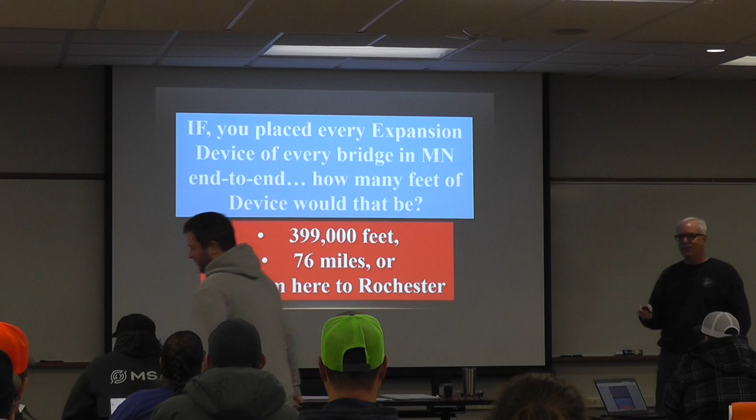Anytime you see this little dude pop up, that'll be a sign that we're going to have a question. I know you have the answers in your PowerPoint, but if you placed every expansion device of every bridge in Minnesota end-to-end, how many feet of device would that be? Anybody want to take a guess? Is it a lot, 1.5 million? 1.5 million feet? Oh, I never looked at that. Well, that's pretty big. Anyway, it's 76 miles, so it's literally about from here to Rochester if we were to stack them all next to each other. So it's a lot.

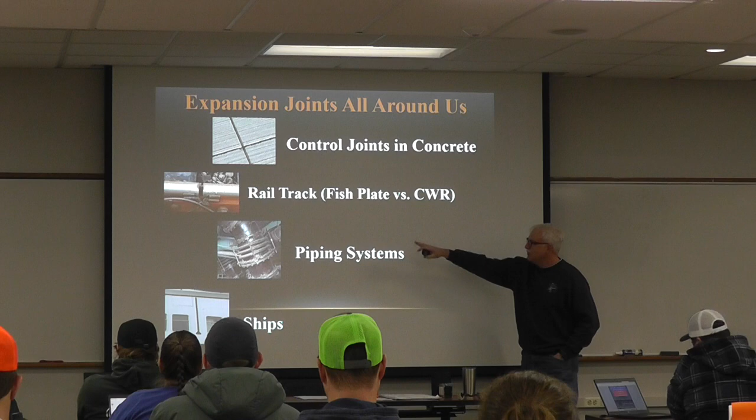Expansion joints are all around us because we have thermal expansion of every material. We always put in control joints. The last I heard from the concrete office is we try to keep them at about 15 feet or so, though that number changes all the time because of the concrete recipes. Railroad tracks have them too, they call them a fish plate. Piping systems have them, and big ships actually have them for flexing and expanding. So they are literally all around us.

Mr. Webster tells us an expansion joint is an assembly designed to accommodate the heat-induced expansion and contraction of construction materials. Expansion joint gaps were built into these structures because there were many cracks and stresses.

We have some older bridges that move a lot. I know of a couple bridges up in Duluth that move their ramp going up to mainline 35. You'd think gravity would make the bridge go downhill, but it doesn't, it moves up. The engineers will scratch their head for years on why, but we just accommodated it and figured it out. That bridge is moving uphill.

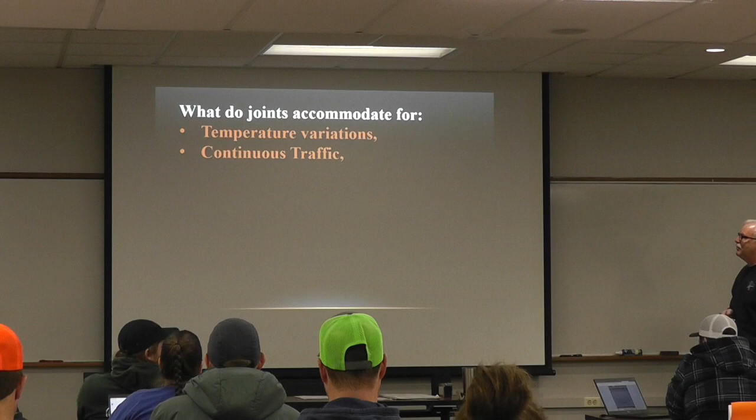What do joints accommodate for? Temperature is probably the biggest one. Also traffic movement, live load, wind loads, we get ice loads on bridges, shrinkage and creep.

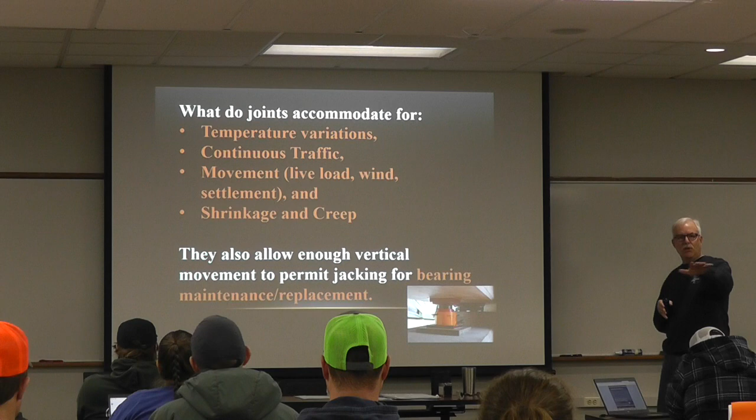Sometimes we have to go out because our bearing assembly has moved. We have some bridges that are pretty active. If you're familiar with 494, past the airport going eastbound over the Minnesota River, those two long bridges, 9217 east and westbound, have neoprene expansion bearing pads in there, and the bridge moves enough that the pad actually walks out underneath the bridge. So maintenance has to go in, jack up the bridge so the expansion joint allows the bridge to come up while the abutment stays static, and they move those bearing pads back into place and bring the bridge back down. So we have to have something in the bridge to allow us to jack it up.

So why include joints on the bridge? Do all bridges have expansion joint devices in the superstructure? Does everybody say yes, or does everybody say no? Who thinks all bridges have expansion joints? Who says they don't?

So we have integral and semi-integral abutments. You've already gone through integral and semi-integral, Paul? Yep, so you guys know what those are, a single line of piles. Where's the expansion joint on that type of bridge?

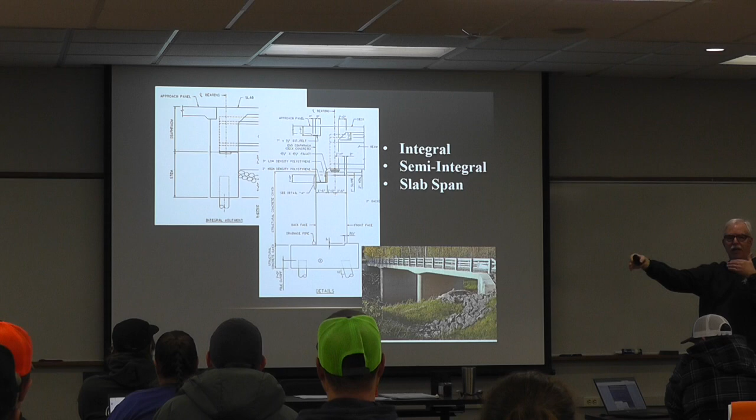On the approach, right? You typically add a 20-foot approach panel tied directly to the abutment, and as the bridge expands it literally moves like this, theoretically. On semi-integral abutments, you sit on a bearing, there's a beam coming across tied into the upper part, and the expansion happens right there. Slab spans are a rig of their own, they don't have an integral or semi-integral condition on both ends. We have bridges that have one type on one end and the other type on the other end.

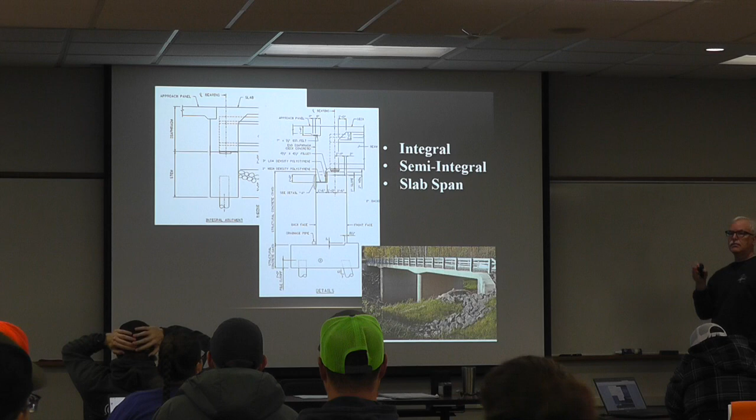Yep, we do. So here's a behind-the-scenes picture of an integral abutment. You can see we put a little tiny neoprene pad underneath there, and some foam underneath the front of that. Then this all gets filled in with concrete right around the beam end, and this allows the beam to rock back and forth like this. The beam's going to flex and move, so we put a little neoprene pad underneath there, and then we fill it all in with concrete. That's what it looks like at the finished end.

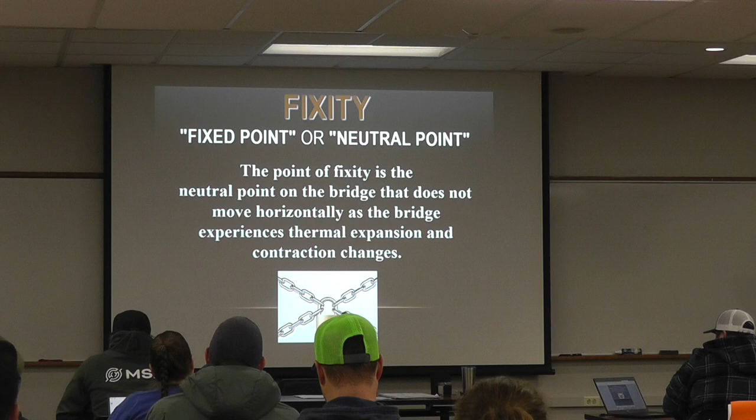Fixity is a term the designers use, and it means the point of fixity is the neutral point on the bridge that does not move horizontally, so everything is locked right in at that spot. If we think of a two-span bridge with one pier in the middle, most likely that bearing would be fixed, so everything is going to move from that point out towards each end.

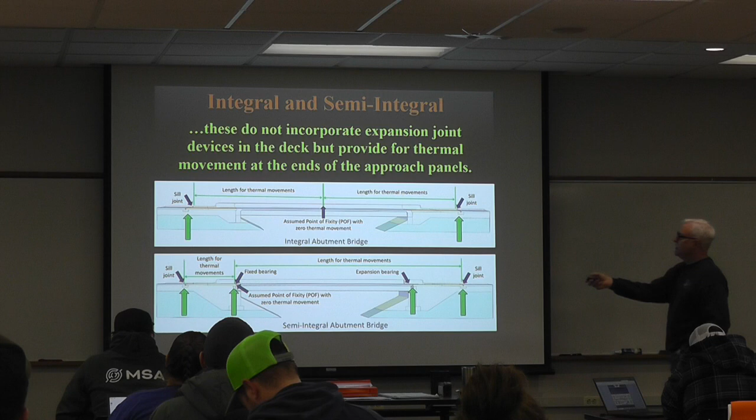Here's a nice little diagram that a consultant put together, and I borrowed it. This is a semi-integral bridge, and you can see we're fixed out here near the center, that's the theory again, so everything's going to be moving this way, or everything should be coming this way. It's not necessarily fixed, but that's the point of fixity. On a semi-integral, you can see this is labeled as a fixed bearing on this end, and then there's an expansion on this end. So they build it so that it's kind of locked in, and all the movement goes this way.

Here's your expansion joint out here at the end of the approach panel. We call that a sill, or sometimes our generic term is a sleeper slab that we would build underneath, and that keeps the approach panel and the concrete main line from having some type of differential settlement. So that sill helps support. Okay, makes sense, everybody so far?

Parapet abutments, those are the high abutments. A lot of times they'll have an expansion joint on each end. And we would still have an approach panel. We would still have another opportunity for expansion out there, because that's going to take up the expansion of the main line coming up to the approach.

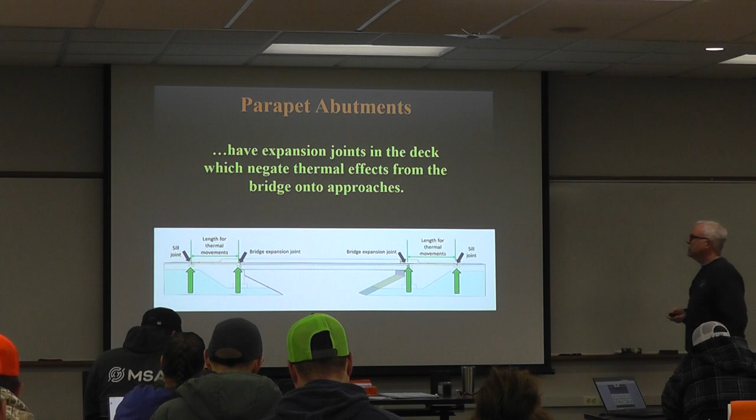So we used to call them E8H, stand for expansion joint, and then this was 8/2, a 4-inch opening, and then the H was a hot pour, and then they changed, they added a 1 in there, and now we're back to an E8 or an E5. E5 is brand new, probably from March of 24, when it was introduced on the new approach panel standard sheets. So an E8 is a 4-inch opening.

You can see that here. This is looking down. Here's the concrete approach, and then there's the main line. So we're going to fill this 4-inch opening with some type of a seal. This is kind of the popular one. It's a real dense foam, and then it has a silicone top on it, which is the UV protection part. And this is under pressure, squeezed right now, so if you cut this plastic off, it starts to open on its own. And then you put adhesive on the sides.

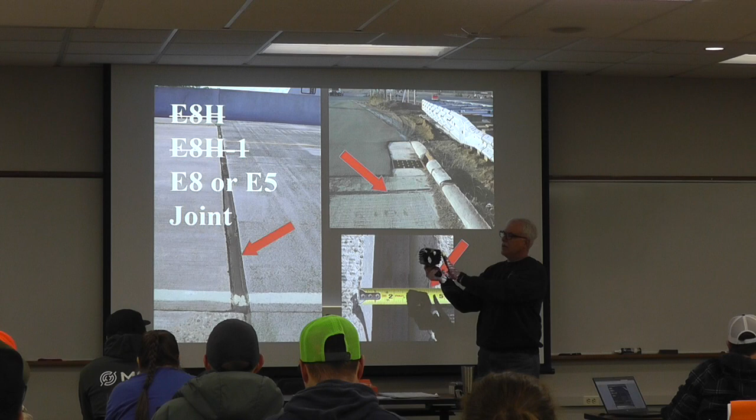It worked pretty well. Another opportunity is this DS Brown gland, and they fill these little ridges on the side with epoxy, and smear epoxy on the concrete as well. On both sides, they push it down. This is the DS Brown JP 400, 4 inches. They call it the JP because it's pedestrian, so it's flat on top instead of being a deep V.

So if people are wearing high heels or something, walking across, you want that to be continuous. This is probably the Cadillac, and this would be the next step down, but we look at them both as equals on the APL. The contractor's going to install most of the time the least expensive product that they can purchase, since we're a low bid state.

Okay, so everybody gets an idea, this was the old style, it was a piece of foam, I think about 8 inches tall, 4.5 inches wide. You put some lube adhesive on the side of the concrete, and push that foam down in there. So it was about 1.5 inches below the driving surface, and then they put a hot pour on top of it. That's what you see here, the hot pour on top, like a crumb rubber hot pour, what you'd use in joints.

All right, so this was the latest I heard: bridges up to 340 feet, we can build without expansion joints on the bridge, so again that'd be semi-integral or integral. And I was going to mention, what does the E5 mean? That's a 2.5 inch joint. So we might have a really short bridge where we don't need a 4-inch opening, so they would choose to put a 2.5 inch joint. When a joint opening, let's say this is a concrete main line on this side, and that's opening up, maybe migrating away.

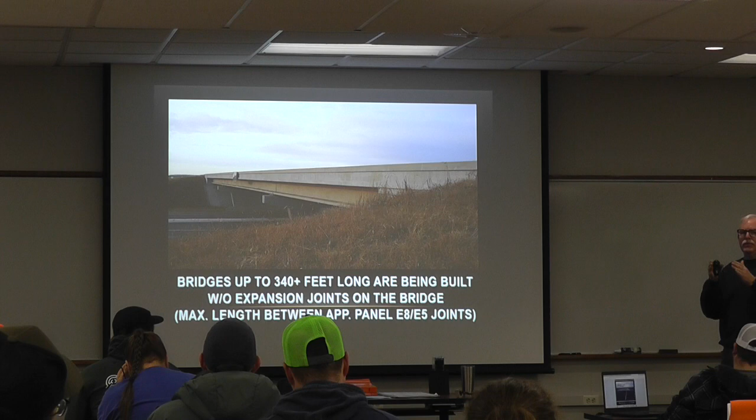When an opening gets to about 5 inches, we start to get phone calls, because that's pretty significant, wheels are dropping into that, especially on motorcycles, and people are recognizing, hey, maybe there's something wrong with this.

So this is 371, I think, up by Fort Ripley, a bridge, and it's an integral bridge. So there's no joint, but there is a sawed and sealed joint there because the bridge is going to stay static, right? It's not going to shrink or dip. But the approach panel is hooked to the abutment, and the approach panel might settle, because we really don't have anything underneath that approach panel as a footing to keep it from settling. So we do put a sawed and sealed joint right where it meets the abutment.

And in this case, since there's bituminous, would there be an E8 joint or an E5 joint in here? Typically not, typically they just butt it right up to it. And then maintenance deals with that, expanding and contracting. In the summer it might expand and get a bump there, and then the snowplow comes through in the fall or winter and takes care of that. So a little bit of a maintenance issue right here.

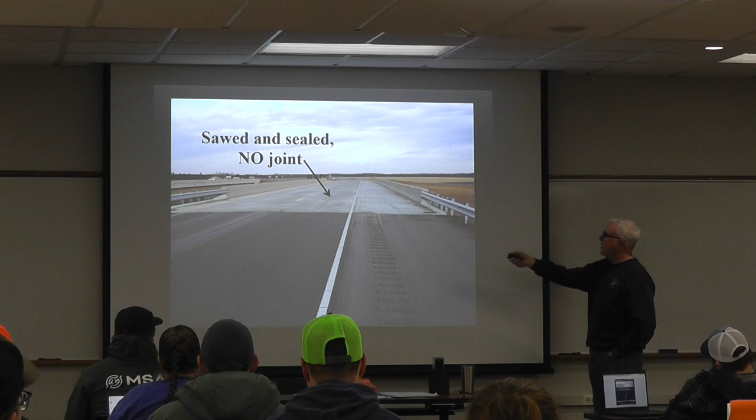Okay, so there are three main types of joints, depending on the amount of calculated movement. First, steel finger joints - the finger joint is literally that. That's two steel plates, and they look just like your fingers, and they open and close like this.

Then we have the waterproof single gland - this is the steel flex. These pieces, which you'll see later when I take you into the shop, have extra big pieces of steel on them, and they're cast right into the deck. And then we have the SSA2 gland, which is kind of the latest and greatest - we've been using this one for a very long time.

So there are different names for that. Some call them strip seals, which is probably the most common. Some people say strip steel, but expansion joint, single gland, strip seals - all pretty common terms.

And then we have the modular joint, and that accommodates really, really big, long bridges. The St. Croix River Crossing had some massive ones - 13 cells, 39 inches of movement. It had to accommodate for 39 inches of movement on that bridge.

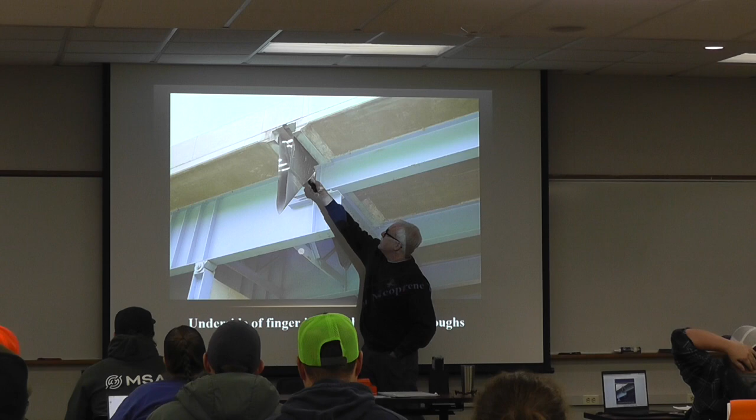So here's a picture. This is Interstate 94 near Fargo, Moorhead, going across the river. You can see there's that finger where the lights come through up here - that's the finger joint.

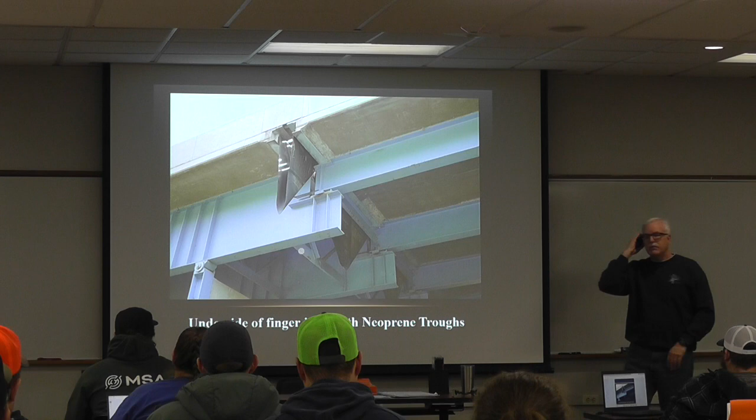But what happens at that finger joint is everything comes through there, it doesn't go off the end of the bridge. So we have to accommodate and put some type of a rubber drape in here to keep salts and moisture off of these bearings, these hinge bearings. Sometimes they call it diapering - there's a trough that's built at a pretty steep angle, so it kind of self-flushes itself. There's a few of these around.

In the past, this has been an evolution with expansion devices. Two main expansion devices were used - one called the steel slide plate, and then the finger joints were pretty common. However, chronic maintenance problems due to leakage, binding, corrosion, and collection of debris are there. Anytime you put steel in the road surface, you're asking for corrosion. Steel always wants to get back to its natural state, so it wants to rust, wants to corrode, and it's a constant maintenance issue. Here you can see a tremendous amount of patching - here is a great example of a finger joint.

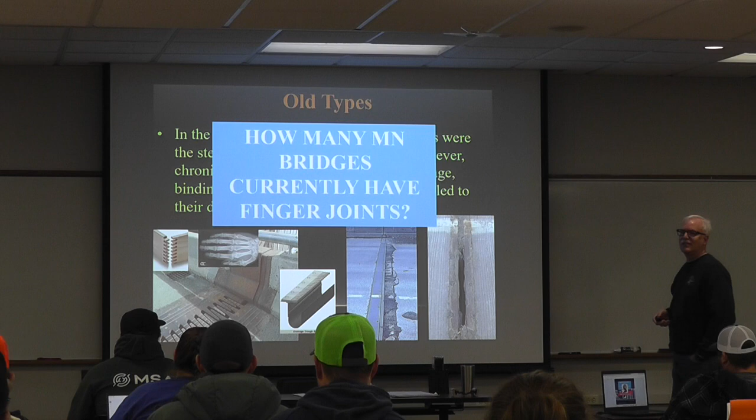So District 7 - that's District 6, I'm sorry, the southeast corner of Minnesota. There's a maintenance supervisor down there named Larry Walensky, a super guy, very knowledgeable about bridges. We built a new bridge down there, and he wanted the finger joints in that bridge instead of the modulars. So that was the latest - this number was going down, but then we added one to it.

That was the latest. I don't know, Paul, if you can think of any other bridges that asked for finger joints - we usually try to get them out of there. With the diaper system to control the water, I think they've become better. With the modular, that's the way we've gone. Modulars aren't cheap, but they work really well. We'll see a picture of one coming up here.

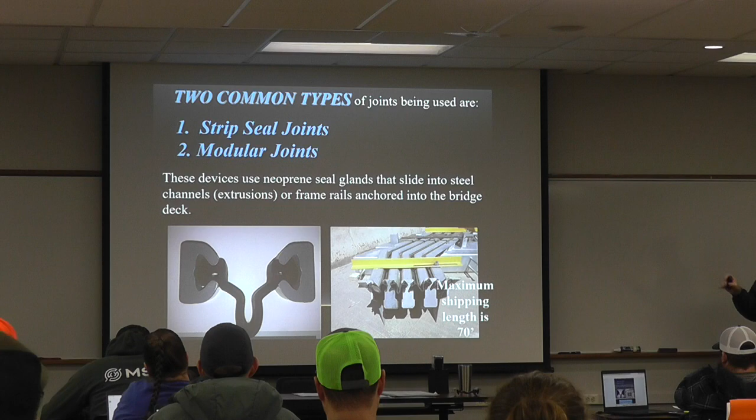When was the first strip seal expansion joint used in Minnesota? Jason? 1974. Thank you.

All right, this was it right here. So like I said, this has evolved. These different lobes and different glands, different pieces of steel have changed over time. You can see from 1974 to 1990, approximately 540 bridges. The fabrication methods group in the bridge office keeps really good tabs on this.

And we have some suppliers that will actually make these glands for us if maintenance needs to replace one. They'll be able to extrude it. They still have the molds.

So I put together a panel, I don't know if I have a picture of it or not, but I put together a panel. We still have it in the bridge office. Tom Merritt was our fab methods engineer, and he had this big filing cabinet, and he had what we call the gosh wow drawer.

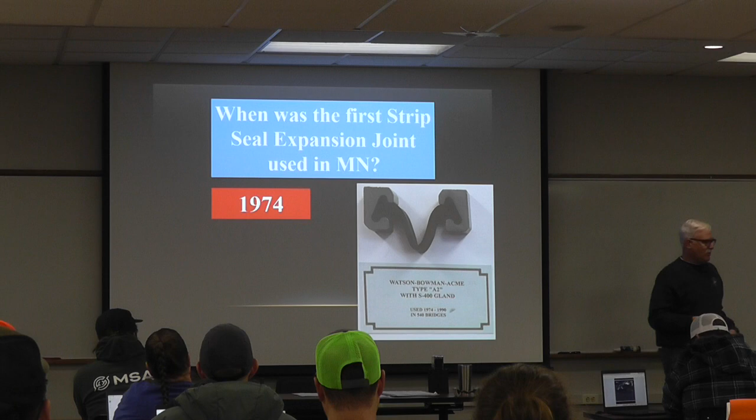You'd go in there and pull stuff out, and he'd show and tell. So one Friday after he left work, I went into his gosh wow drawer and I took all these pieces of glands and stuff like this home, sliced them three quarters of an inch, painted them up, glued them on this big board, and he was so proud he'd carry that thing around to meetings. It's a great example of all the different glands we use.

So how does an engineer determine the need for an expansion system? For a simple single span, it's usually fixed on the lower end. Like I said, we have some bridges that move uphill, but typically that would be fixed and then you'd expect it to move up. Again, typically, generally speaking.

Two-span structures are fixed at the pier, we talked about that. And for a three-span, they really literally have to investigate the stiffness of the structure, and they'll figure that out. So there's no hard and fast rules, just some theory and investigation that they have to do.

The number and location of expansion joints is determined based on the maximum joint opening. Typically, we're looking at 4 inches on each end of the bridge, unless we're looking at one of these big bridges—then all bets are off.

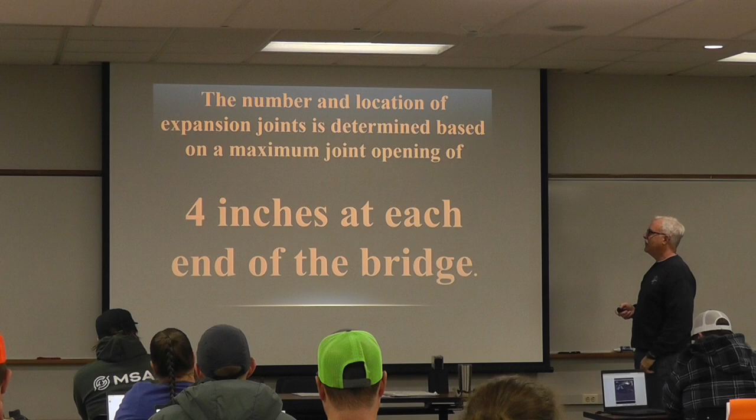When joints exceed 4 inches, we can provide a modular, or we can provide additional joints at the piers to split the superstructure into segments. So like those 2 bridges by the airport, 9217 east and west of 494, those have multiple expansion joints—can't remember how many, maybe a dozen.

As you're going across the bridge, next time you drive it, listen for them—boom, boom, boom, boom, boom, boom, like that. They're doing a big rehab on those 2 bridges. I think this coming summer will be the end of it. But it's just such a big bridge, we had no choice but to put in joints.

So in the past, we used to put in scuppers. A scupper is just a drain tube in the gutter line that drains right out into the water or wherever it wants to drain. And hydraulics told us a few years back that we can't do that anymore.

So we have to try to build our structures with enough vertical curve in them to make sure the salts and stuff get off the bridge onto the land instead of dropping into the water. So you'll see a lot less of that. You can probably notice the difference—we have a lot of bridges with a lot of scuppers, but we try not to do that anymore.

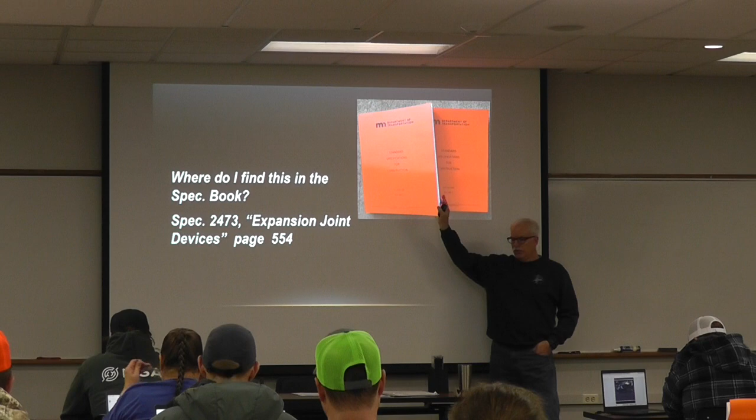Okay, where did we find this information? A few years back, everything used to be in spec section 2402, titled steel bridge construction. Then 4 or 5 years ago, we figured that expansion joints—the single gland and the modular—had enough of their own information that they should have their own section of the spec book. So we switched over to 2473. That's where you find the information now.

And this is what it looks like on that page: a watertight expansion joint device consisting of a formed, non-reinforced strip seal that is mechanically locked into the structure.

And then when it gets to the railings, what does it do? At the barriers, it turns up, so that we're trying to keep all of that nasty stuff that's on the bridge going off onto the approaches, not into the water or below.

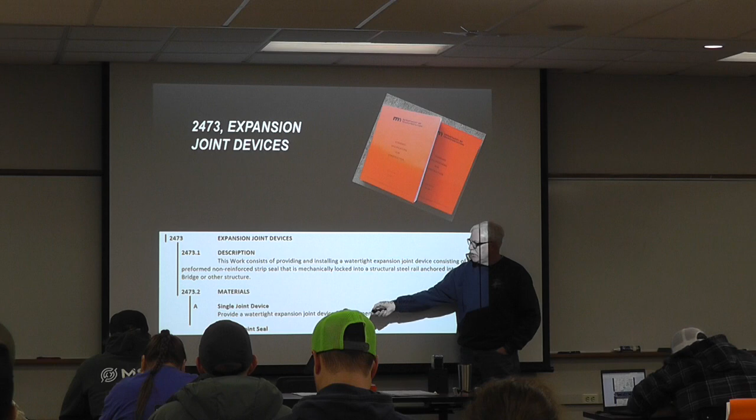In that section of the spec book, there's the single joint device, and the modulars are in there as well. If we're going to use a finger joint, I think we're going to write a special provision for that.

Okay, so let's take a look at the bridge plans and then some standards. Lots and lots of detail. So this is a raw standard sheet right when the designer gets it.

Anytime you see these little bubbles like this, they will all be deleted when the designer is done with it. But this is notes to the designer.

This particular note here, we're trying to tell them how far below the road surface is the top of this joint. So from this point to the top of the road surface, we're trying to tell them the depth. So the depth might change if the bridge is at a skew and we have to put snowplow straps on top of these.

So we put a steel strap across the top. When the snowplow comes along, the snowplow just continues to ride right over the top. If that snowplow strap wasn't there, then that plow blade has a tendency to drop into that, and it really makes a mess out of the plow, the driver, and the bridge. So that's what this is about.

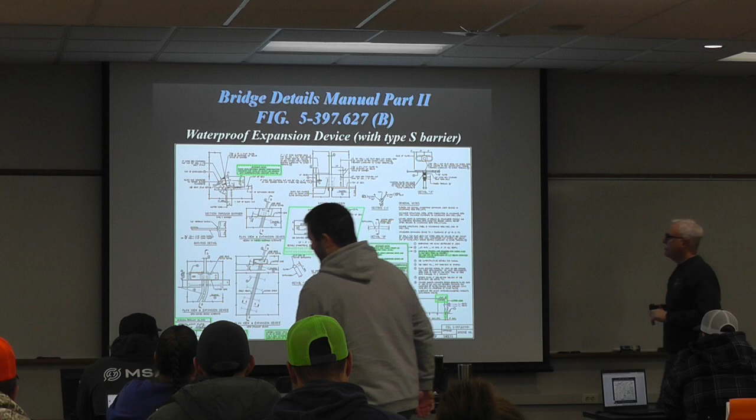Sometimes we plane our bridges for noise reasons, so we would finish the deck and then this big planer would come longitudinally and drive down the bridge and remove a certain thickness and level it out. So it depends on if we have a snowplow strap or if we have that planing going on. That's what this table's all about.

They're going to put a number in here, and that's what you have to assure when they do the dry run. When that machine comes over the end of the bridge, you want to be there, and you want to make sure that it's that 3/4 or 7/8 of an inch or whatever. Not like this, and not like this — it has to be just right.

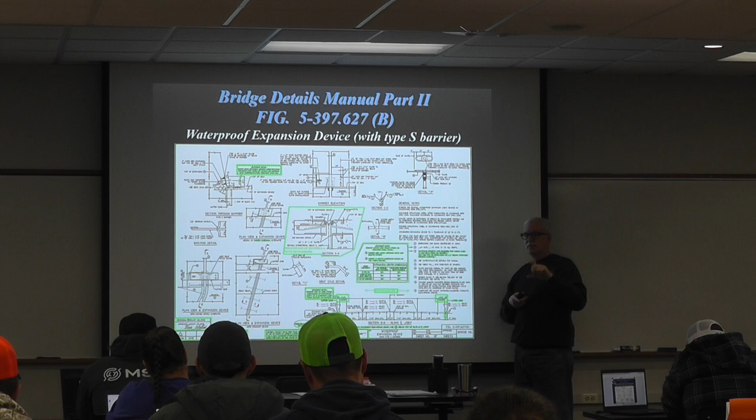And we have them that are like this. The St. Peter Bridge, 169 over the river, there was an error — something happened during construction. Anyway, that's the whole story behind that. We won't get into that. That was a bad scene.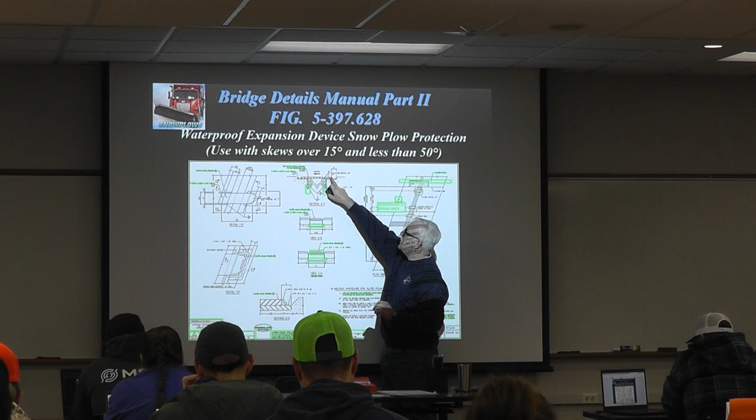Ton of information on here about expansion joint devices. This is a detail here, very, very detailed. These little angles will come welded already onto the strip seal, and then this is the snowplow plate, and that will be welded in the field.

There's a very specific weld procedure. There's also some information in here about what they have to use, how they have to prep that, and how they have to weld that.

The biggest thing is that the rubber gland will already be in there when they lay that steel strap on top. So they have to — there's the expansion device right underneath here — they usually will fill that with like some wet sand or something to prevent the weld splatter and stuff from wrecking that rubber gland.

Super important, what you see here are the wheel tracks. This is where cars should be driving typically. We try to keep those snowplow straps out of the wheel tracks. We found really early on that if we had one in here, the slap from semis or whatever would bust those pretty quickly. So that's what that's all about.

Some more information here — some of these dimensions have changed. So the first plow strap is 1 foot off the gutter, and then we have a maximum spacing. But we'll try to lay this out for you, so it's not as simple — you just got to make sure that the contractor's following the plan.

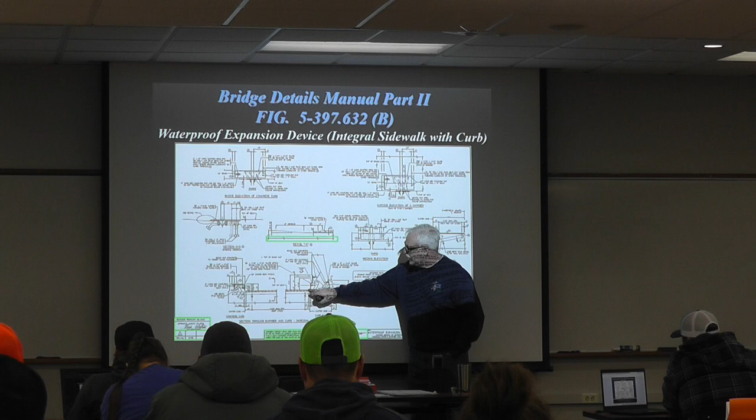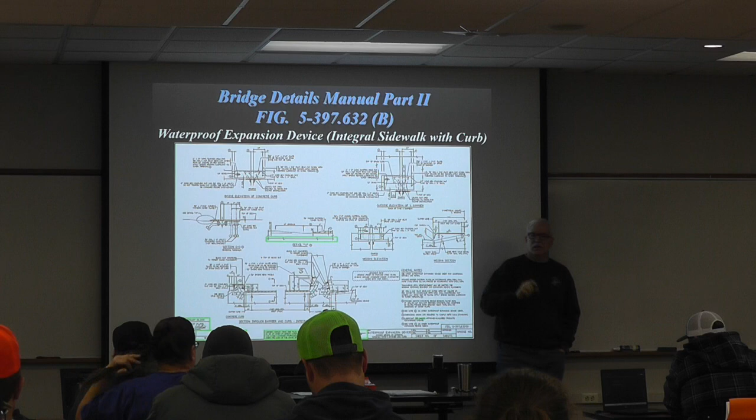I just want to show, there's that turn up, right? It goes up into so that everything stays in the gutter. So this might be a sidewalk right here, and then we have a traffic barrier, and then back out onto the bridge, driving surface here. But in each barrier we have turn-ups. If we have a sidewalk, it's just going to be a little bit longer, but it's still going to be there, okay? And that gland is going all the way through. The gland is coming all the way up. It's going to stick about an inch above the end of that extrusion, okay?

When they're setting these expansion devices, so here we have a center median, a roadway surface, a traffic barrier, a sidewalk, etc. We have elevations, and the people that are putting those expansion devices in, I think, do a really good job. They're shooting those elevations all the time and making sure that they're correct.

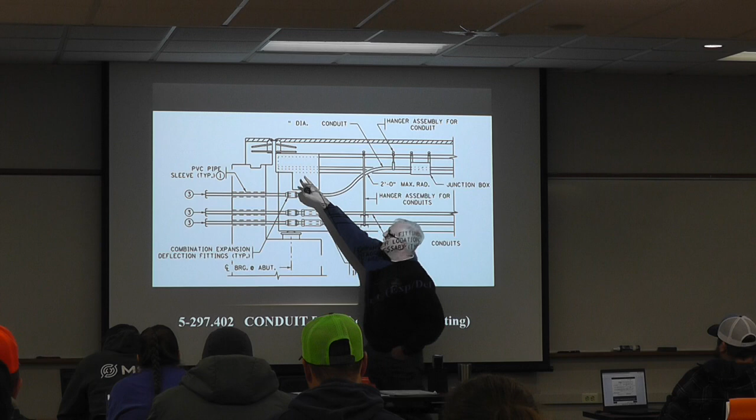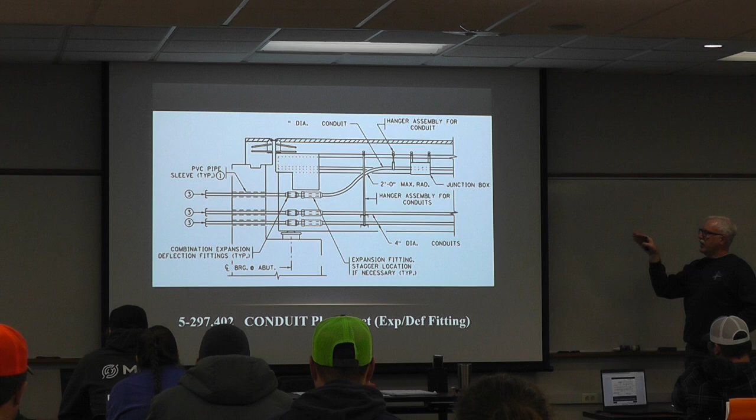So this would be the bridge coming across, and then it hits the abutment. There's the bearing, and then sometimes we have conduits in here. So there's our expansion joint. So the bridge can open and close this way. This is pretty static, right? And the bridge can go up or down. So if we need to jack it, we can lift the bridge up. So for that reason, we have to put expansion deflection joints. So they expand and deflect so that the conduit doesn't break, right? The conduit has to be able to do the same thing that the bridge is doing. So you'll see those.

It's kind of all things expansion today, right? It's going to go forward into the concrete, and usually especially for the deflection, it's just going to be a big rubber tube so that it can move, and they put shrink wrap, bubble wrap, something, whatever they each have, different things to create that void around that deflection, okay?

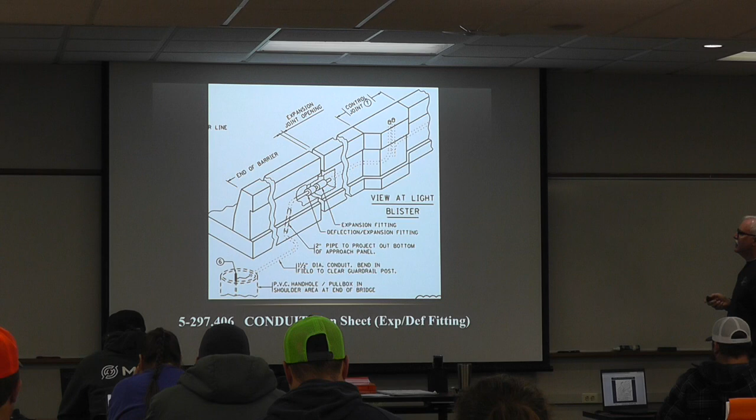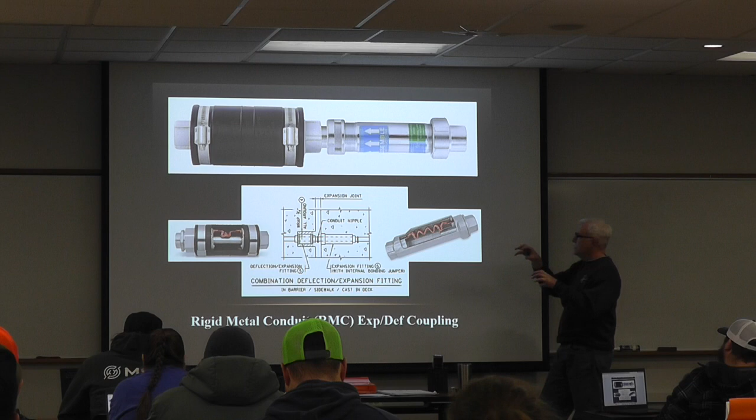Here's a good picture of what that looks like. So this is a sleeve, and the conduit goes inside of this, so this can go back and forth, and that's the big deflection. And everything is grounded, right? Everything is grounded, so there's jumper wires inside. But that's the void I was talking about right here, around this deflection rubber, so that it can go up or down. So again, if we're going to jack the bridge, we have to know that that's in there, or we're going to tear something apart.

Okay, so shop drawing review. We, in the bridge office, the designers put together the sheets, pretty generic looking. Then they go to a fabricator, who's an approved fabricator, and they have to draw up their own shop drawings, which are super detailed. And then those shop drawings come back into the bridge office, into the Fab Methods unit, and they look through them to ensure that everything is correct.

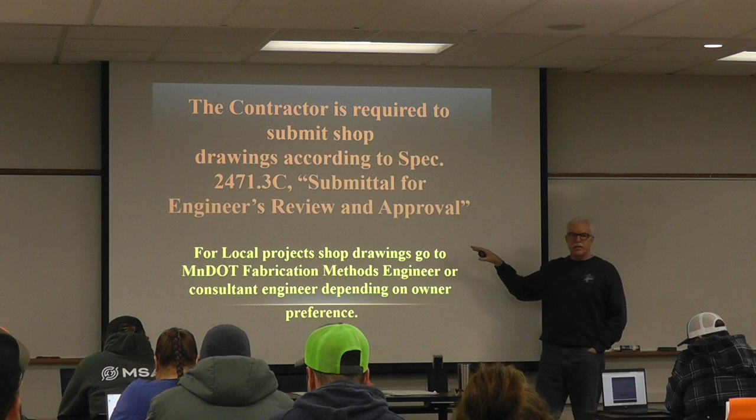Okay, and that's just where it's spelled out of where they have to send them and stuff like that for review. Local projects, cities and counties, they can choose to defer that to a consultant, or some cities are big enough where they can do it in-house. Minneapolis, they have their own bridge crew, bridge team. But for all MnDOT jobs, they come into the bridge office to the Fab Methods unit.

So this was Ironworks. They do a fantastic job. I asked them if I could show their shop drawings in class. They said absolutely. So again, what's the little flag mean? Field weld. So this device is going to come out. There's a crown break right there. That's the center of the bridge. That's a crown. So they'll put everything into those right elevations and the field weld that.

Okay, here's the plow strap detail. There's the gland. Minnesota requires a 1/4-inch gland. Most states require 3/16. So we're unique in that area, but we found that 1/4 inch is better. So that's something you're going to look for.

We had one modular joint come out for the Bloomington Ferry Bridge, and the inspector saw it got offloaded off the truck, and he looked at it, and he could tell just from a distance that those glands didn't seem thick enough.

He called the bridge office and said, I think I got an issue out here, I put my tape measure on it and it doesn't look thick enough. So I grabbed Jisha Lin, our Fab Methods engineer, and took a little field trip out there, and sure enough, it was built by D.S. Brown, and they had used the wrong gland. Just that little thickness difference, the inspector could pick that up.

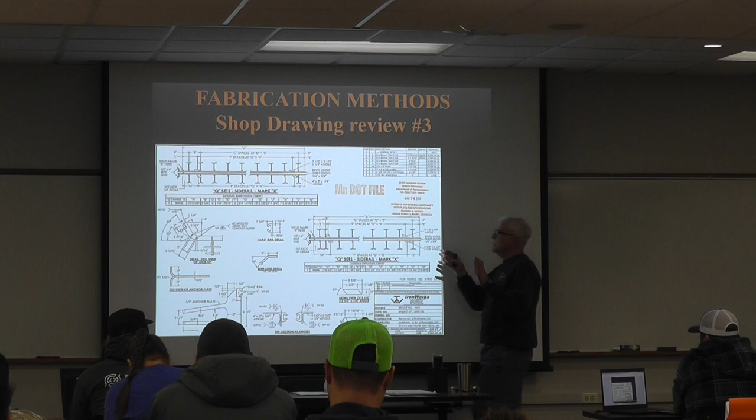I'm telling you a lot of information you don't really need to know, but it's kind of fun to know. So here's the detail for the turn-up, and we have to make sure that's all built correctly when you're out in the field. Here's that big steel anchor that this little strip gets welded into, and this is what locks it into the abutment and also on each side into the deck.

I'll back up one here. Here's the little angle, you know what we're talking about? So this is the side where it's going to get welded, the plow strap's going to get welded on, and this is the side that it's going to slide on. So those are all, there's some raw material right there, stock that the fabricator has.

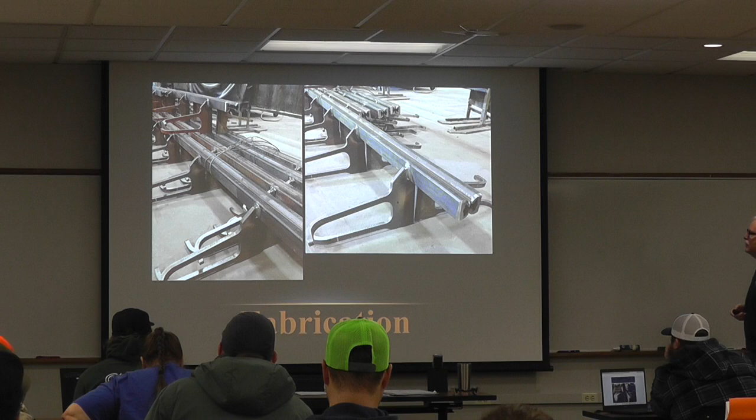And then this is what it looks like after they get it welded. You can see they chamfer these edges, so this is going to be butted together and field welded. You can see that's all prepped. But now where this thing ends up going is it goes into the hot dip galvanizer.

So we have two sections in the spec book, 3392 and 3394. 3392 is for small items like nuts, bolts, washers. 3394 covers most everything else, minor components we call them. Expansion devices will be covered by this. So in that section, it'll call out a certain ASTM, like I think it's A123 or something, that the galvanizer has to follow to galvanize our products.

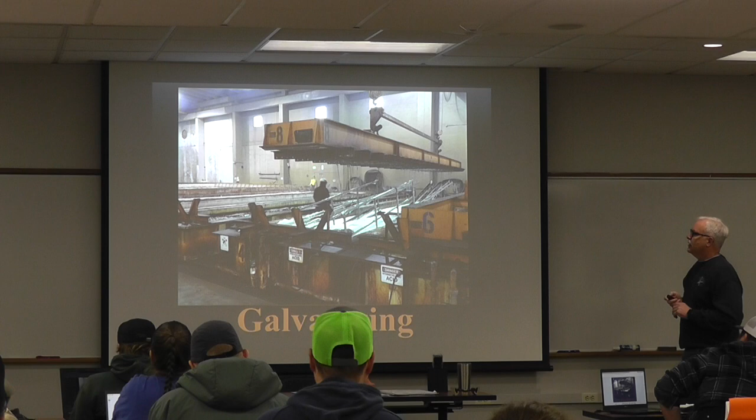Okay, so this is at the galvanizer. This is actually Zulk, one of the bigger galvanizers. You can see right here, hydrochloric acid bath, I think it's about 10 to 15% acid. So they dip the steel in, and that takes off everything that's not supposed to be there—sometimes it'll take the mill scale off, it'll take any oils or greases, just super cleans it. Then they dip it into a couple tanks to neutralize that, and then they just take it right over into the vat of zinc. This tank is 60 feet long, about 8 feet deep, and about 10 feet wide. So it's molten zinc.

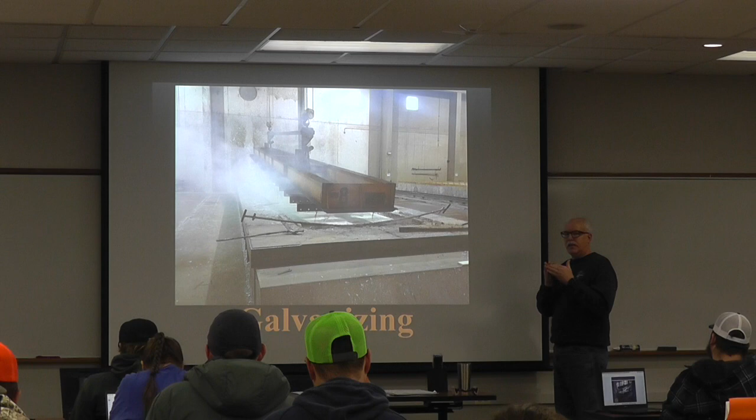Things go in, and it depends on the thickest piece of steel on that piece being dipped. So if the thickest piece of steel is 3/4 of an inch, the person dipping it knows they have to leave it in there for 5 or 6 minutes, whatever it is. If it's 1/4 inch steel, they leave it in less time. They always go by the thickest piece of steel because the zinc is actually melting together with the ferrous metal. Everything comes out at an angle so that it self-drains. Typically if there's moisture on anything, that's why you see all this splatter—you don't want to be near this thing unless you're protected like that guy is.

Because it'll blow, the steam will just poof and go up to the ceiling. They also have to make sure there are no seal welded tubes, meaning no vent holes. The vent holes have to be pretty big, because if you trap moisture inside that tube, the whole thing's going to blow. So they're very, very careful in that area.

It's a neat tour, it really is.

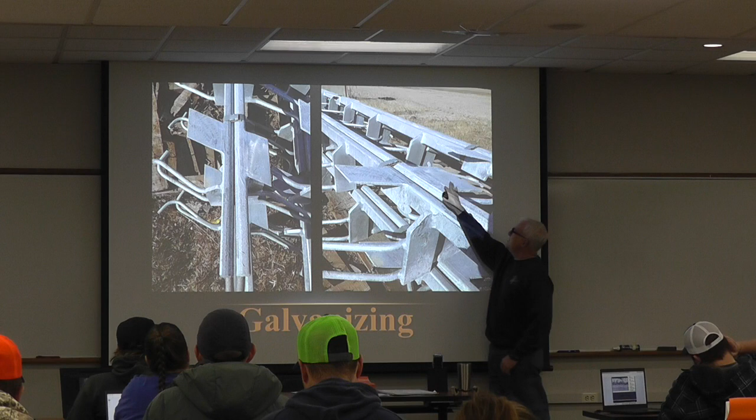So this is what it's going to look like, this is the hot dip galvanized snow plow strap. This is the side that's going to get welded on, so the contractor has to grind this galvanizing off before they weld that strap on. Okay, that's what it looks like.

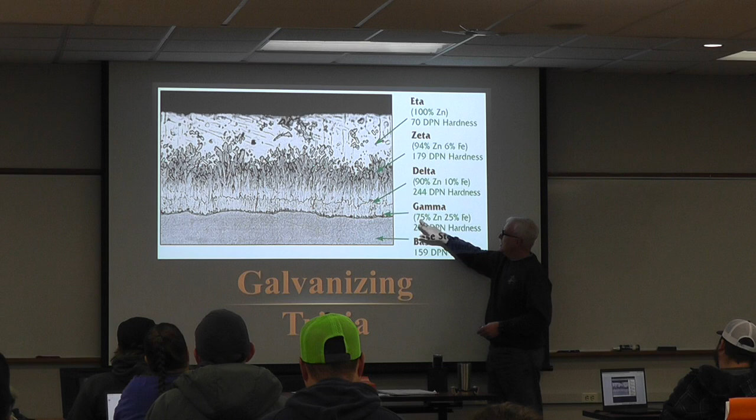Just some general trivia for your knowledge. Here's the steel we're coating, and when they put it into the zinc, it melts into the steel. This particular layer is called the gamma, about 75% zinc and 25% iron. There's another layer called the delta, the zeta, and then the eta, which is 100% zinc.

So when they're grinding, you want to see sparks coming off their grinder. And when they're welding, if it foams and looks porous, that means there's still too much zinc in there, so if the weld looks wrong, it probably is. We want these snowplow straps welded on correctly, or else our maintenance people are coming out in the fall having to do a lot of extra work. They're not just grinding a little layer of zinc off, they're literally grinding down 4 to 5 mils of galvanizing.

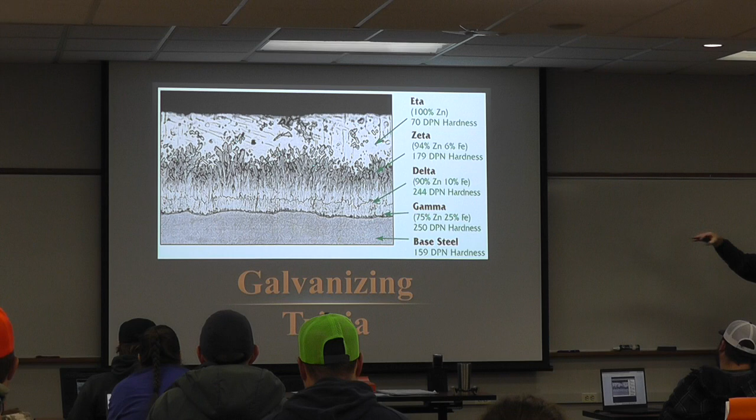That's pretty neat, that's the beauty of hot dip galvanizing. It actually melts in, it's not a topical coating, it melts into the steel. They galvanize lots of different things, and it lasts for a very, very long time.

Question: how hot does that zinc bath have to be? It's right around 840 degrees.

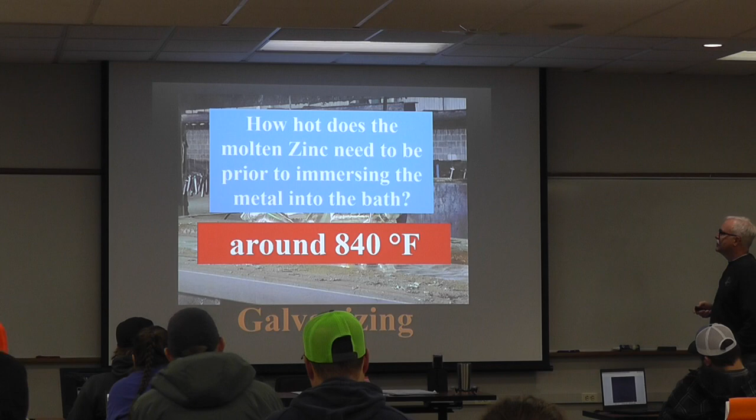Structural metals inspectors - we have a team of four people in the bridge office that go from fab shop to fab shop on a regular basis, constantly testing for thicknesses. They go to shops fabricating the steel to look at the welds, make measurements, and collect x-rays if they're building something like a steel girder.

The contractor mostly has their own quality control that they have to follow, and then our group does the quality assurance, which is what you guys will be doing. So you look at their results and assure that everything is correct.

But they will take spot measurements - they have an instrument that can measure thickness. Our ornamental railings are hot dip galvanized and then powder coated on top of that, and they have an instrument that can measure the thickness of the galvanizing and the thickness of the powder coating. Both have to be a certain thickness, so they're constantly giving inspection tags for anything steel.

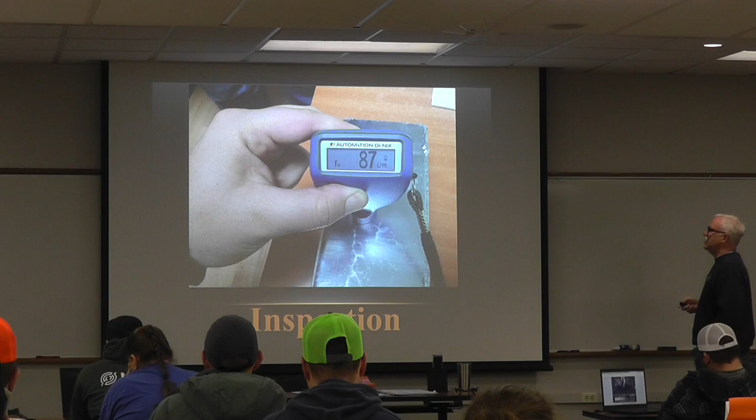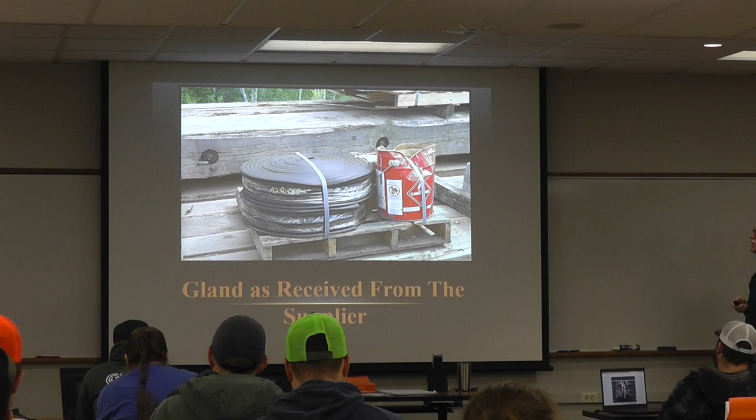They're pretty good about it, but it's something to watch. So typically we do not allow any welding of really anything on a job.

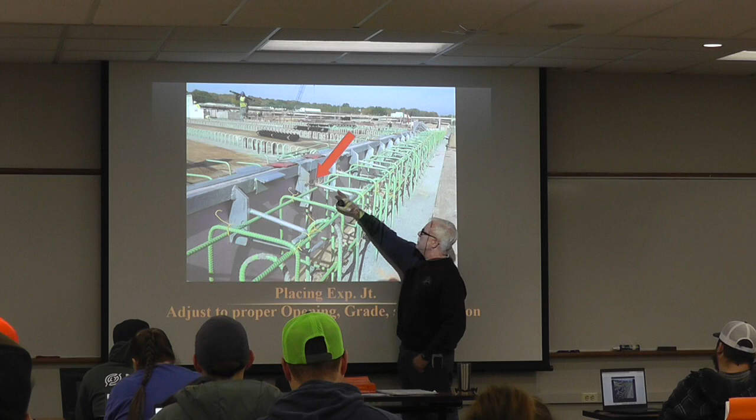Except for the expansion joints. It's so critical to get this joint set at the right elevation, the crowns, that we do allow some tack welding - we'll allow them to tack weld to our reinforcement bars. Here you can see they have an adjustment rod, and they put a PVC cup down here at the bottom of the concrete form. But we do allow a certain amount of welding to lock it into that spot.

These little steel plates are just tack welded on one side, and they're there to keep that opening at the right opening. So you'll see a picture. So this is the abutment, that's the bridge.

When they get probably about 10 feet out during their concrete deck pour, you'll see the foreman of the deck pour walk along that expansion device with a crowbar and pop those off. So the bridge is crowned before we put the concrete on it. And then as we put the concrete on it, it comes down, that residual camber comes out, so it starts to flatten.

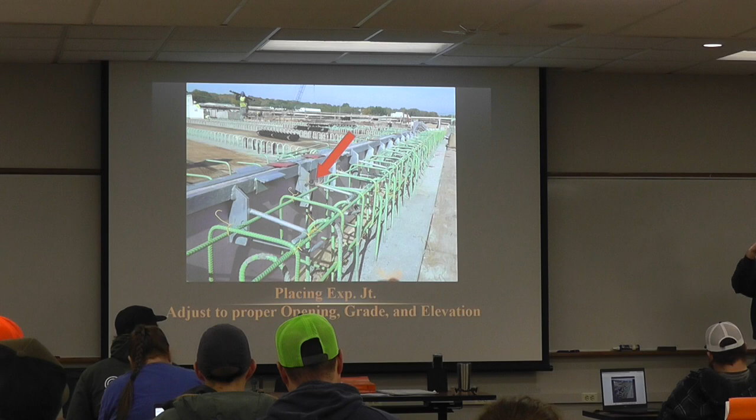Well, you can see if we got this expansion joint welded tight with these plates, it's not going to move. So we start to get out there, and he pops that plate off. So now that bridge side can start to rotate with the beams in the bridge as it's getting loaded.

Right here you'll see that's a median barrier, or it's a median itself, in itself. There's the little plates. They just hold the extrusion in place until the deck is being poured.

Here you can see you're coming across, and there's a gutter line right there, and then you're going up through into the median, and then back down again and across.

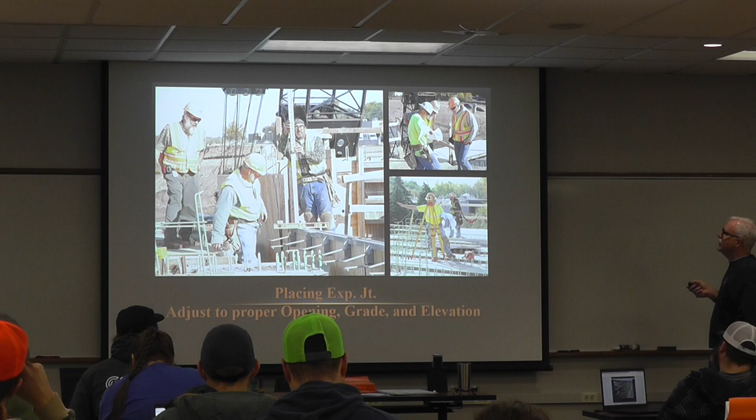Pretty detailed work, like I mentioned earlier. They got the surveyor out here, shooting, making sure that everything is where it's supposed to be. Inspectors - we got 2 MnDOT inspectors saying, we think we saw a problem over here, let's look at the plan. So you're talking to the foreman again.

String lines - they're perfect, they work really well. So here you can see a string line being attached right here. A little bit of tack welding we allow.

Yeah, a lot going on here in this picture. I think I mentioned this on Wednesday that just before the deck pour, you're going to want to walk out here, walk across. You want to make sure there's no tie wires laying down in here, no paper tags, no nothing, right? Because what you see down there now is what you're going to get after the deck pour.

Typically, the contractor will put some 4-inch wide duct tape over the top of that joint just before they pour this. We want to make sure that they're vibrating really good in this area, to get good consolidation underneath and around that joint. So yeah, we got a shop vac out there because there was a little too much debris down in there that we needed out.

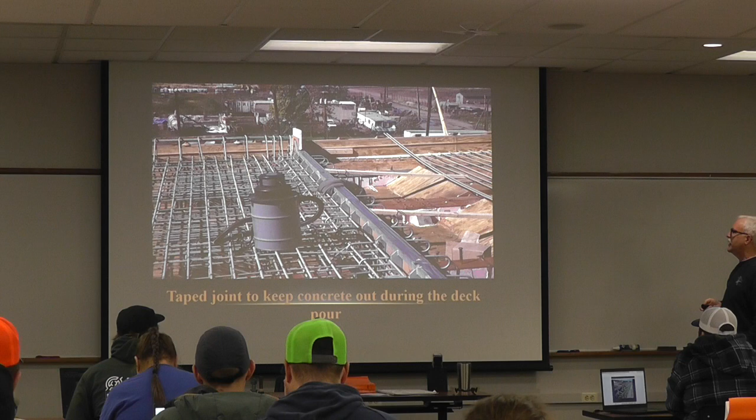Here you can see they're starting the deck pour, and you can see the gentleman here with the vibrator making sure we have great consolidation. It's the right height here. And then you can see here's our foreman, and he's walking along popping these joint plates off of there.

3 most important inspection details: setting of the opening for temperature - that'll be told what that needs to be in the plan. The top elevation - again, when they do the dry run, you'll be observing that to make sure that they're the right height, and to make sure that the gland is tucked in afterwards. They have some really good tools now, so you don't typically have a problem. So once the bridge gets a little bit older, sometimes this gland will rip or tear for some reason.

So they came in and took the cover plate off, the pedestrian sidewalk, and now they're just about to put a new gland in this one.

Here's a modular. You can see that we have these huge cover plates that go up and over the top of the barrier, so that when snow plows or whatever are coming through here - we can't have an opening bigger than 2 inches or it becomes a snag hazard for a vehicle. So say a car hits and the hood catches in that 3-inch opening, that hood could grab and it basically comes off the car and it comes through the cab of the car. So we're very, very sensitive to our openings in our barriers and railings.

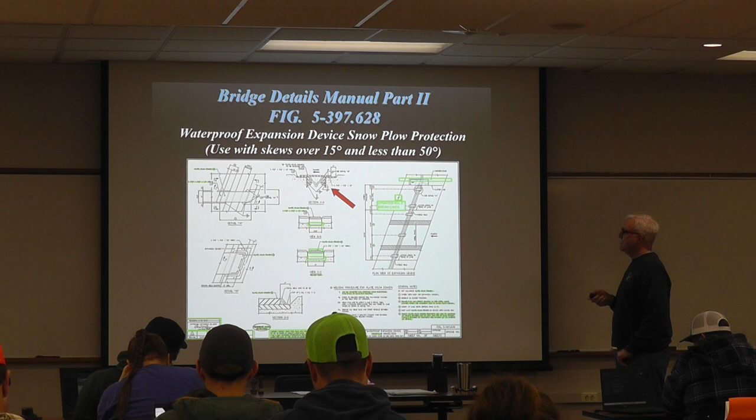So super, super important: at the end of the day, 3/8-inch snowplows need to be recessed about a 1/4 inch below the top of the road surface. There's a table our designers have to use, but the note on that sheet will tell you what distance below the proposed driving surface it has to be.

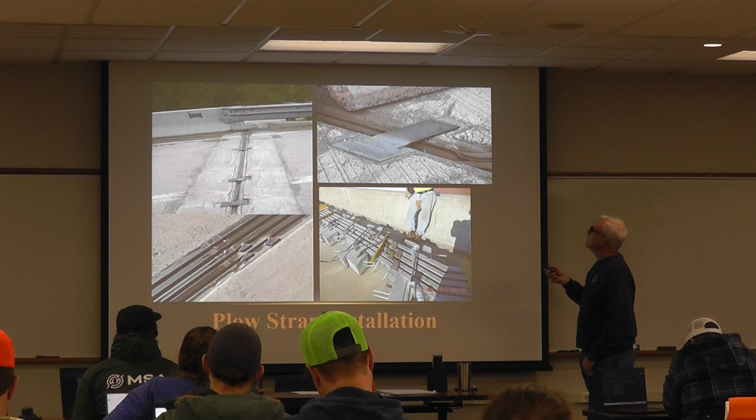Here's a good looking snowplow strap. For welding, they weld one pass, weld the second, weld the third, come back over once it cools, back and forth three times. There again is an example of snowplow straps snapping off.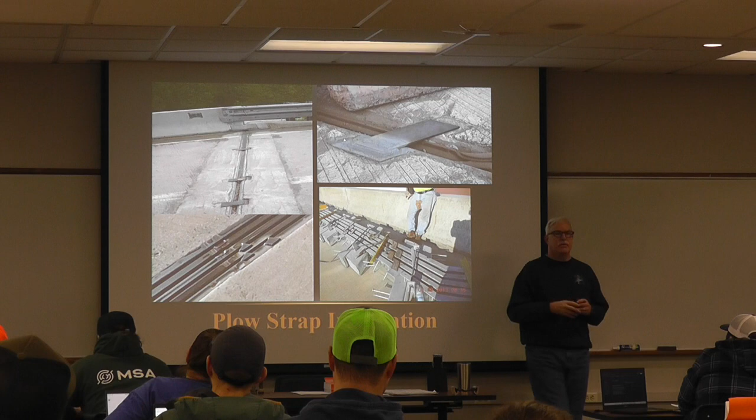This welder right here is standing leaning against the barrier because I just told him that he put these on wrong, and he was trying to figure out what he was supposed to do now. The problem he had is he didn't move these over far enough to weld them on, so if this thing were to completely close up, this snowplow strap would have hit this one and snapped it right off. So he put them on wrong. Luckily we caught it pretty early on.

I shouldn't have said that I told him he did it wrong. I was standing with the inspector. I never direct anybody; I give my directions to the inspector, and the inspector then talks to the foreman, and they fix it. So in that case, I meant to say that I saw it being a problem, and I told the inspector, and he told me he had to fix it.

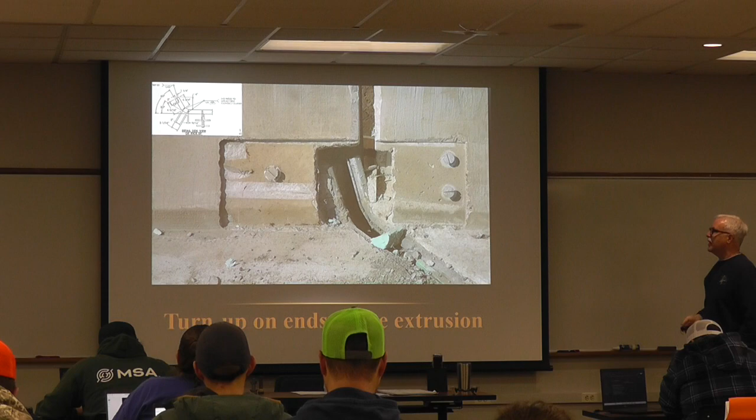So that's what it looks like behind the cover plate. There's that turn-up area, and again we want everything to stay in this gutter. It's very important that the contractor cuts that gland off one inch above the steel, and it has to be horizontal. One inch above the steel, and that's in the plan for them to do it that way. There it is, right there. Cut the gland horizontal, because that keeps water from coming all the way up to the top before it goes over.

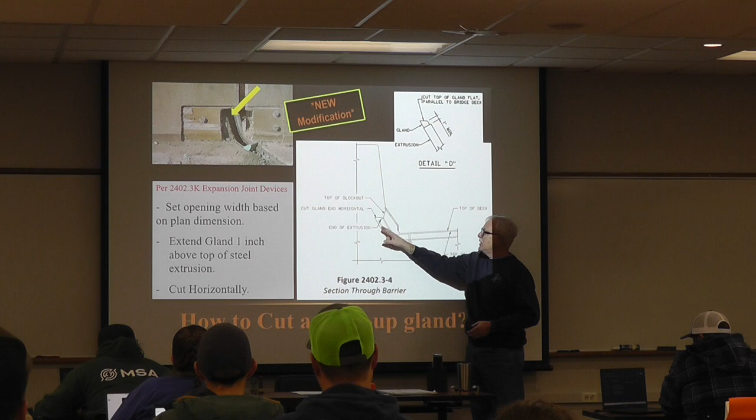So we were finding that the contractors were putting this in wrong. That's the reason we put this detail D in, because they were sometimes leaving the gland way down here. We just started to see it, so we had to put a stop to it.

Already talked about that. There's an example right there of the plate being put in backwards. Traffic flow was going this way, and the expansion was happening over here. So that's not a cheap fix for a contractor.

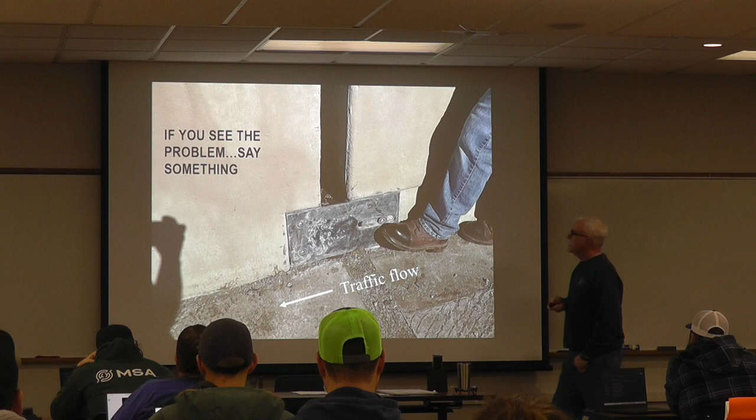You knocked all that out and re-poured all the stuff. Yeah, so what they have to do - these are fixed anchors right here - they had to come over and put new anchors in, another new anchor in. So they have to drill, and usually we have some super good adhesives. We drill the hole, clean the hole, put the adhesives in there, and stuff that anchorage assembly in. So anytime you do a redo, we don't like that, but there's always an option to fix it.

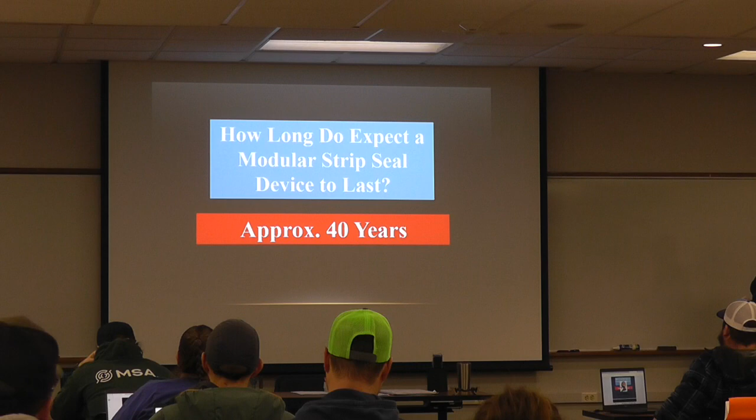How long do we expect these to last? Typically around 20 years, and if we have a modular, again, they're pretty expensive - 40 years is kind of the goal we're looking for. Some last shorter, some last longer.

Bridge maintenance takes over once the bridge is open. If you're out doing inspection and you walk underneath the bridge and you see all this sand, well, it wasn't from a mole - it was from the expansion joint gland up above leaking. This can be very detrimental to our bearings and the ends of our beams. So it's super important that this is caught and that maintenance gets out there, and they either put a patch, or sometimes they have to re-gland, or sometimes we'll write a contract for multiple bridges.

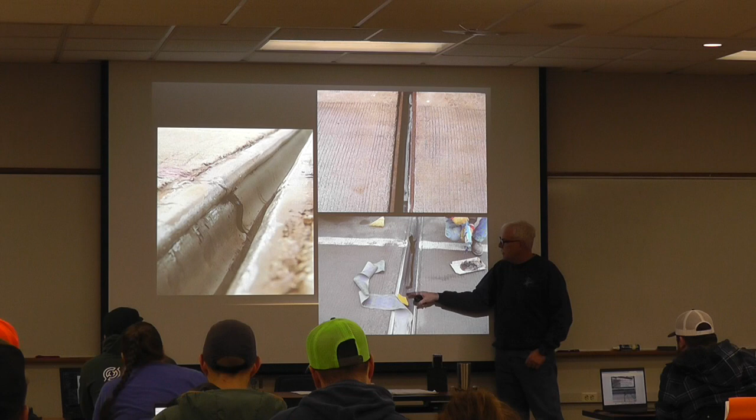So there's a sign right there, right? That's not because that's where the tire's going across - that's because there's a hole in that gland and it's just leaking right through. There's some different products out there. Belzona is a pretty popular product that they like to use. They clean everything up, put some adhesive in there, and put some more rubber gland in. They do this now and then. There's the Belzona right there.

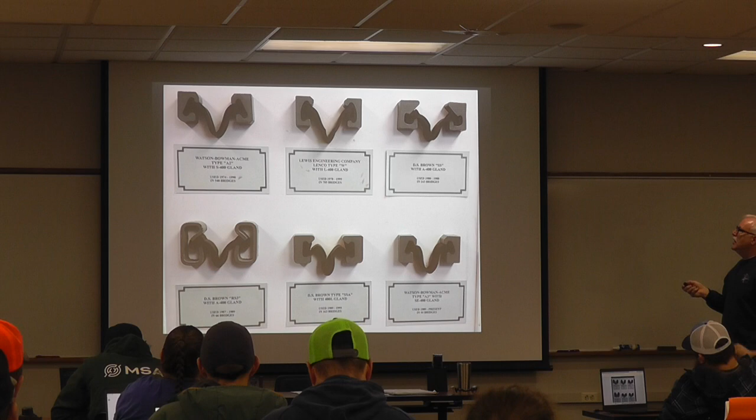Oh, here, I forgot I had this in here, sorry. So there's the first gland, 1974, and you can see how it evolved. The problem with these is the lobes weren't in tight enough, so you get this full of sand, incompressible stuff, or ice, and then a semi would drive across and pop it, popping the glands out right up here.

So you can see some of these lasted a little longer - that's 243 bridges. This one was junk, made of like 1/4-inch steel and it bent, so we only had 66 bridges in a couple years. 163, the Watson Bowman - that was one of the better ones as well. This was a really good one too, I thought.

And then here we are today, 1993, and I can't show you anything new after that because this one's working. The SSA2 gland is working really, really good - it's held in here really nice. These are the modulars I was talking about: this is DS Brown, this is the Watson Bowman Acme, and this is the Steelflex with the L2 400 gland modular.

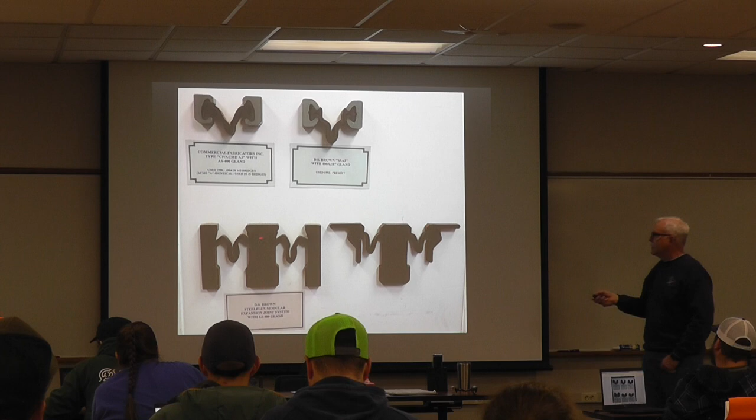There's an APL for this, that's the lube adhesive that goes in there. In the past, there was every type of tool, whatever somebody could bend up on metal to assist in getting these things installed. Stay away from this when they're doing this because it's super messy. If you get it on you, it literally has to wear off, kind of like getting super glue on your hands.

This is the newest tool. It's just a pneumatic gun with a chisel point that's blunted on the end. They can literally just ride this thing right along here and rattle it right in. Super fast, so most everybody has gone to this.

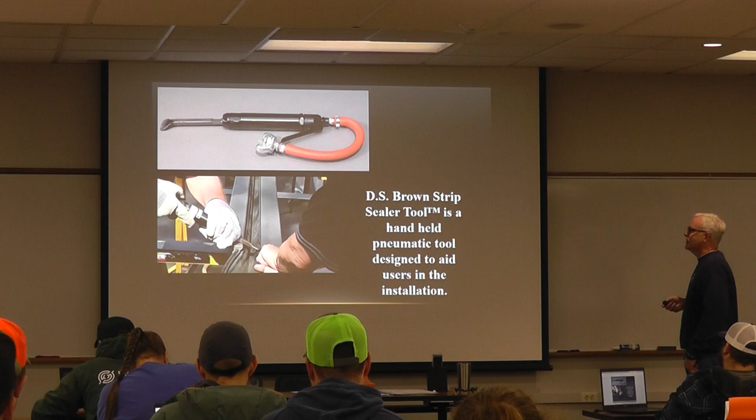Reasons for replacement - sometimes the fixity part, the bridge is supposed to move one way or the other theoretically. If it doesn't, maybe it moves all one way instead of both ways. This is what's going to happen.

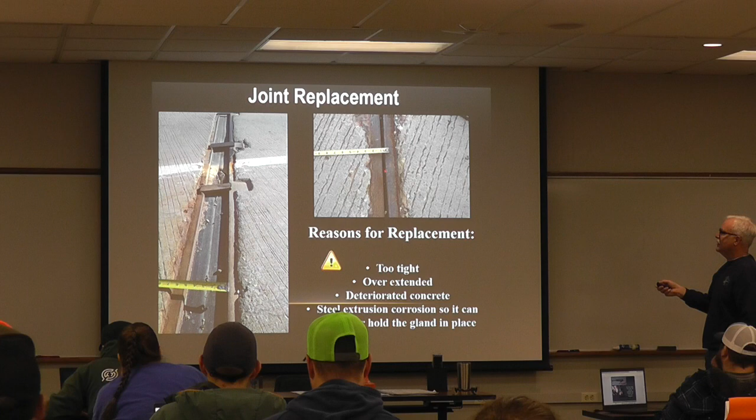Our regional bridge construction engineers, and what Paul used to be, they would go out and review this with district people, and they would say, yep, this is at its max, we're going to have to - you can see the plow straps are almost off. So this is too wide, so we'll tear that out. This is too tight. So here's an example of a replacement for this.

They come in and saw cut a certain distance, usually a foot, foot and a half. They use some hammers - they have to be extra careful when they do this.

So if you're on this job and they bring out this big jackhammer, remember the ends of the beams are right here. We've had jobs where they bring a big chipper in and boom, they knock the whole end of the beam off. You can see it down in here - there's some destruction of the end of the beam.

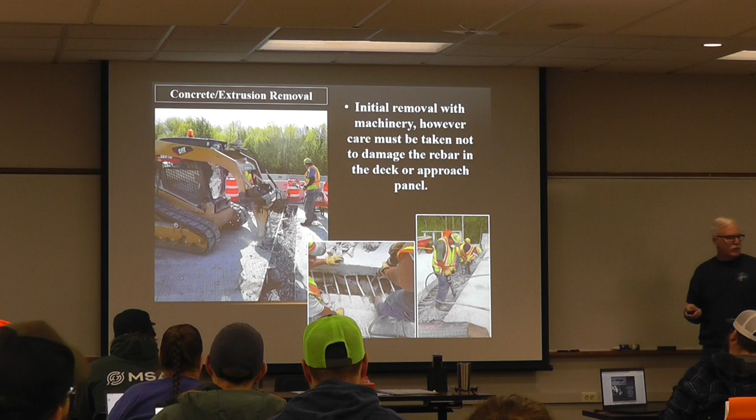This is what we like, these 15 to 30 pound hammers, for doing this removal. They straighten the rebar. Sometimes they have to, if it's epoxy coated, recoat it. Maybe they have to put some more rebar in here.

Looks pretty clean now, setting the joint in. They put some spanners across here, set it to the right opening, 2 inches typically, and getting ready to pour the concrete. Goes pretty smooth.

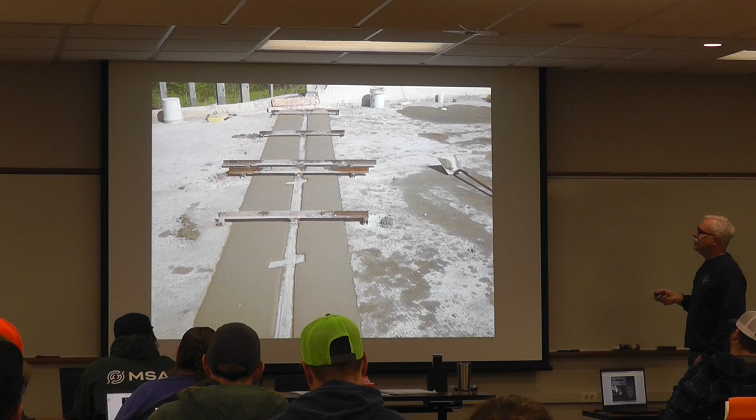Got our plates in here for snowplow straps, and here's the finished product, back together again.

In the spring, our maintenance crews go out and try to flush every bridge. So that's the cleaning part, repairing and placing the gland, establishing and replacing the joint if it's too wide or too narrow, repairing the steel extrusion. Welding the plow straps back on - for some bridges it's annual.

You can name a few - they know that the bridge is moving, it's bouncing, and there's fatigue on that plow strap and it snaps off. So in the fall, right before winter, they're out there putting new straps on. And there's always some spalling going on that needs service.

That's it. I'm 2 minutes ahead of schedule, so any questions on expansion devices?

I've seen the joint replacement jobs - that's the worst place, contractors have a hard time getting it cleaned out. They want to always just blow it out and not vacuum it, and a lot of times it goes down quite a ways and just swirls down there, garbage. Yep, and most of the time they'll refuse to bring out a vacuum to back it up. I don't know why, they just fight it.

Gotta be on them, right? You gotta be there, you gotta be observing. I brought them the little nozzle, the real thin one, way down in there, and the adapter so they could actually use it. Otherwise they weren't getting garbage out of it. It's important - all things that they have to do.